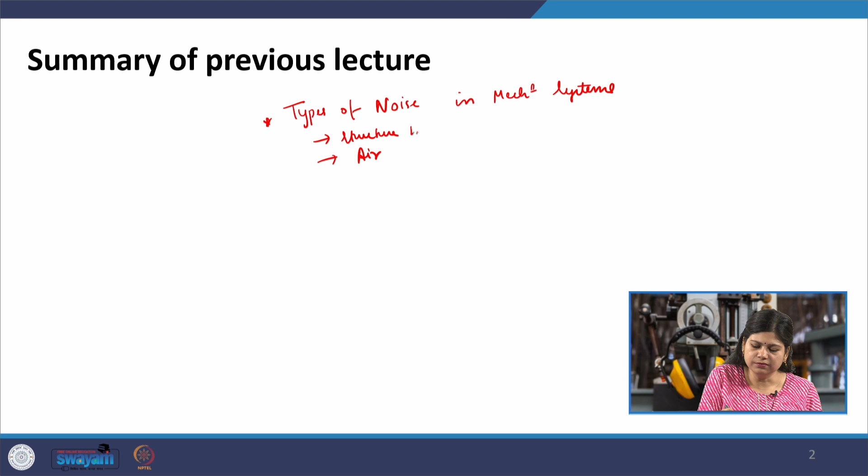So we have begun our module on noise in mechanical systems, and so far we have studied the types of noise typically found in mechanical systems. You have the structure-borne, air-borne, and the fluid-borne types of noise, and then the types of noise in some of the common mechanical systems and their noise sources, such as the noise sources in an engine, in rotational machinery, in fans and compressors.

What are the typical phenomena through which the noise is created, what kind of noise is present, what is the frequency and the temporal content of these noise sources within the mechanical systems and mechanical subcomponents. And then we have also discussed the mechanism of noise generation in these various mechanical devices.

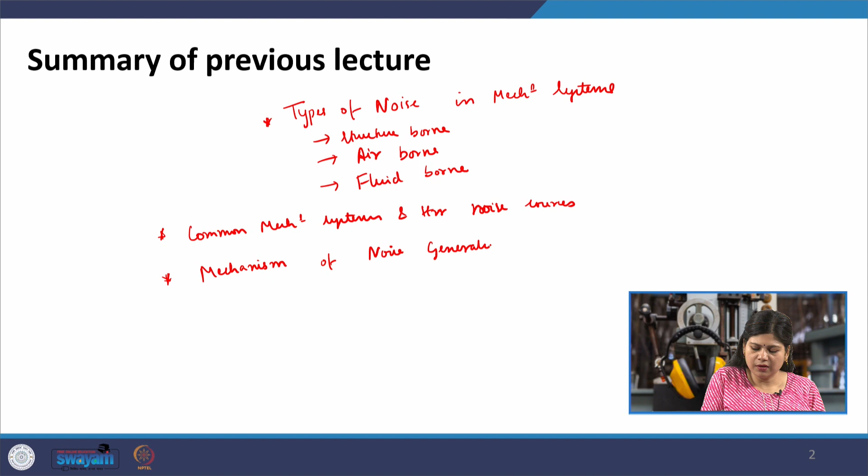So, in this lecture we will study structure-borne noise and air-borne noise in more detail, because these are the two most common categories of noise in mechanical systems, and each of them has a different means of propagating and spreading, and therefore they need different types of noise control techniques. So, we will discuss these things in this lecture.

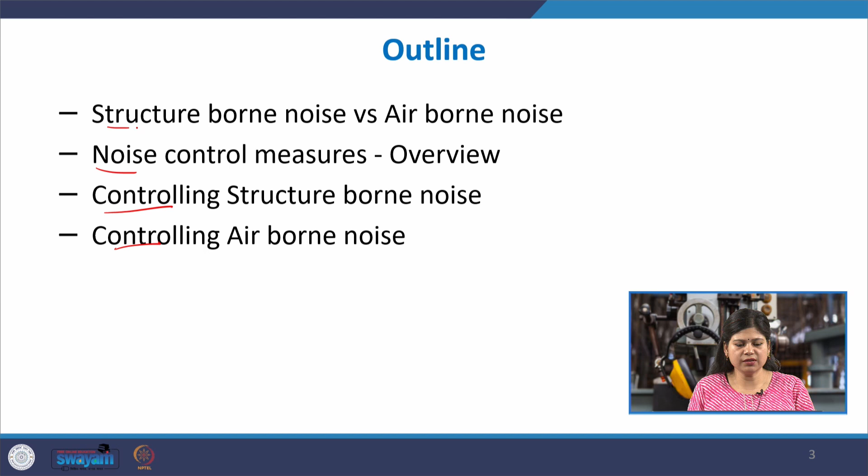So, quickly to recap, the types of noise present in mechanical systems can be divided based on how they propagate, and we have the structure-borne noise, air-borne noise and the fluid-borne noise. These two are the most common forms of noise propagation in mechanical systems, and then we have the fluid-borne as well, but the mechanism of fluid-borne noise is more complicated and is kept out of scope of this lecture series.

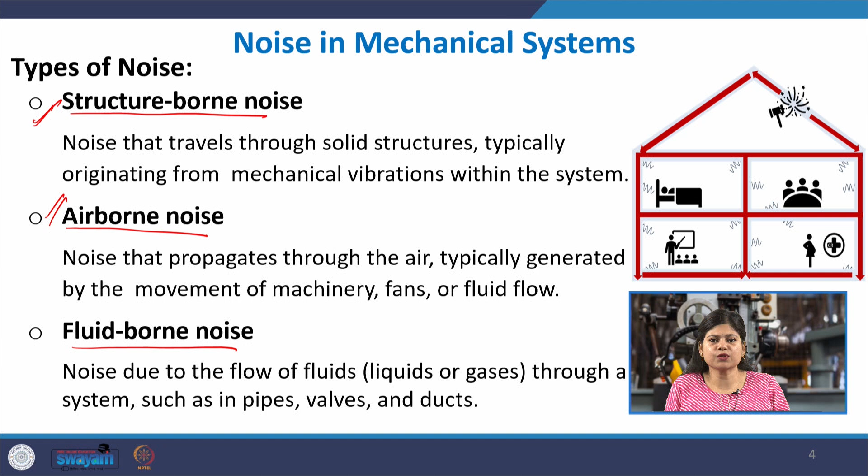So, let us see the structure-borne noise. What is the definition here? These are the sound waves which propagate through the solid material, like the material of the wall, floor or any kind of body of the machinery, and they move within these structures typically as flexural vibrations.

So, let us say this was some kind of a source attached to a long plate or a mount, and this created the noise, and this noise propagated in the form of flexural vibrations of this plate, and then later you have a receiver here, and from here it radiated outwards and reached the listener. And we have already studied the radiation phenomenon and how plates or solid structures can radiate longitudinal sound waves based on the flexural waves created in their structure.

So, here the waves typically propagate through the solid structure in the form of flexural vibrations or other forms of vibrations, and then after a certain threshold they start radiating outwards into the surrounding acoustic medium or the fluid media, and then it can be caught by the listeners as audible noise.

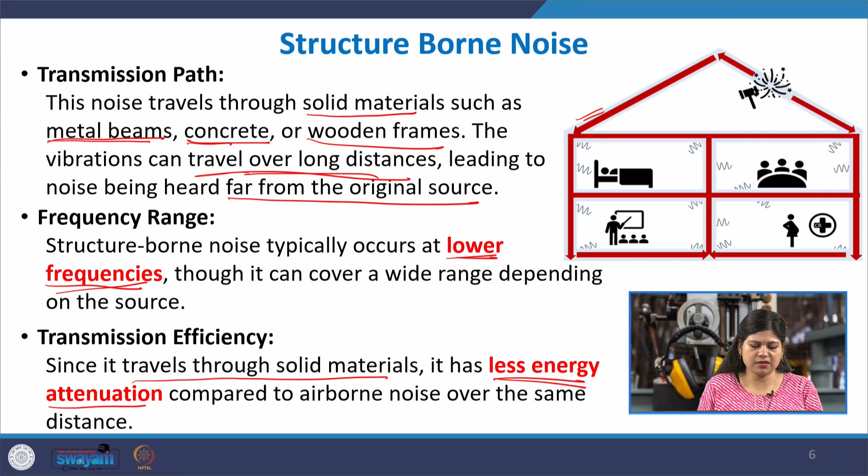And as I told you, the transmission efficiency: because it travels through the solid structures, usually there is much less energy attenuation compared to the airborne. So, they can be heard much louder even at further distances. Let us see the airborne noise in comparison to structure-borne. So, again what happens here?

So, in the previous case you had some noise source which found some pathway through the structures and propagated by means of vibrations in the structure, and finally after a certain point or after a certain threshold it radiated outwards into the air and was heard by the listener. So, the structural elements were one of the major paths through which the sound wave was propagating.

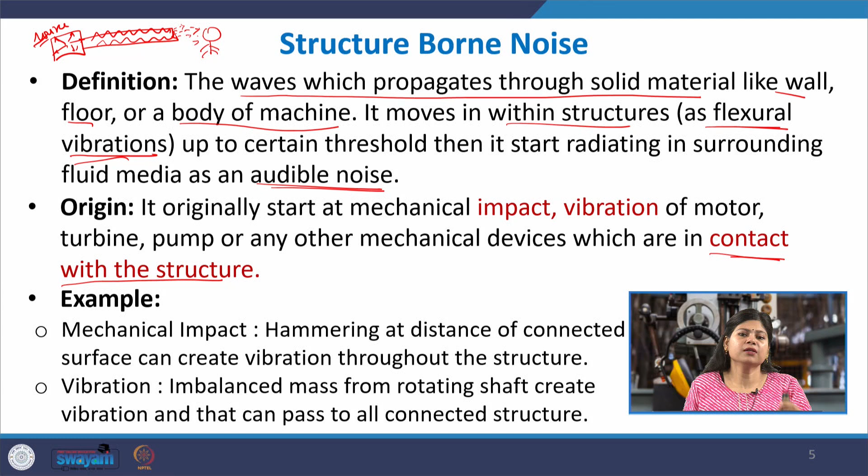But in the airborne, whatever is your noise source, let us say we have a typical example of a person speaking and then there is another listener. So, for example, I am speaking to you. The person is speaking and is creating these speech signals. They are radiating directly into the air. There is no structural pathway here.

Directly from the source they are going into the fluid acoustic medium and are radiating forward as longitudinal acoustic waves. So that becomes your airborne sound. Almost all of the sound that is created from the source is directly going into the air, and then it is being received by the receiver, and there is no significant involvement of structural elements in the pathway.

So for example, the conversations you have, or if somebody is playing the guitar, once again that is airborne sound. Some of the machine tools are creating sound which is propagating outwards in the air. So usually it comes directly from the source into the surrounding environment, like the vehicle horns, the speech, the music, etc.

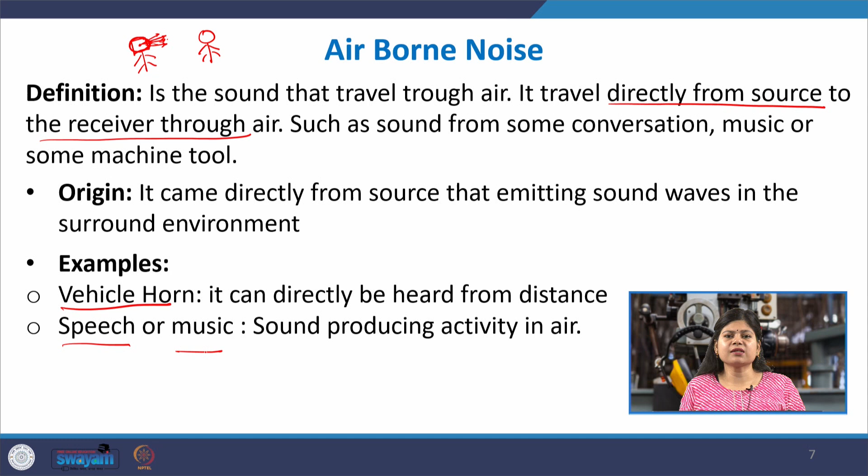All of these are examples of airborne noise. So what is the transmission path here? Obviously the transmission path here is the fluid acoustic medium, the most common being the air or the atmosphere that we live in. Okay, so air is one of the most common media through which these sound waves are propagating. So what happens when the sound waves are propagating through the air? There could be various obstacles on their pathway.

They can find some obstacles like walls, barriers and other such materials which might be able to reflect, absorb or transmit a portion of the sound waves that are incident, and hence these airborne sound waves get attenuated, because in our surroundings, in our atmosphere and in our environment, whenever there is a noise source and the sound waves are propagating, definitely they are going to encounter various kinds of materials and obstructions in the pathway.

Okay, it could be in the form of some object that might be present, some person might be standing, there could be walls or buildings, trees, anything that is present in the atmosphere will be able to reflect and deflect some of the sound waves, and hence because of this the attenuation keeps happening over distances. And not just the presence of these objects, even the air itself has its own resistance.

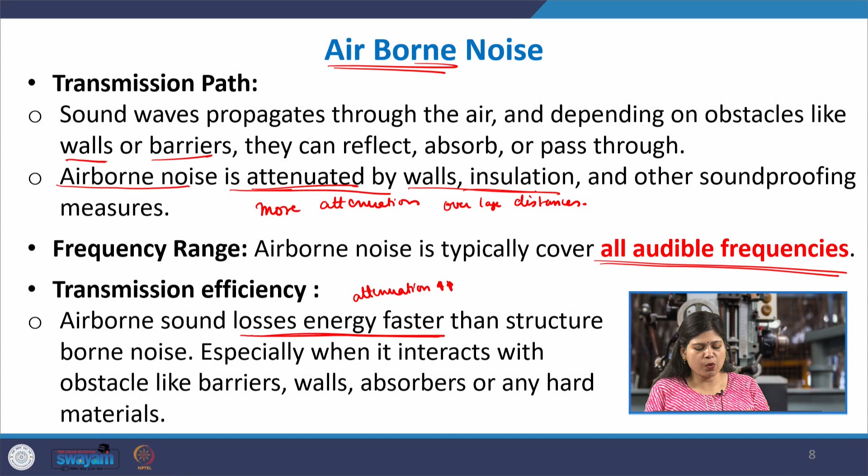The transmission efficiency: obviously the energy is lost much faster. So as I told you, the attenuation suffered by the airborne noise is much more compared to structure-borne, because the sound wave gets to interact with a lot of things in the pathway, the barriers, walls, absorbers and a lot of other things.

So let us see how to control these two different types of noise, the structure-borne and the airborne. In the module on the principles of noise control, I had told you that if you want to control the noise, you can do that using the source-path-receiver model, which means that you either modify the source, which is the most efficient and effective method. You simply change or redesign your source so that it ends up creating less noise.

Otherwise, if you don't have that option, the machinery has been installed and now you are going there as a noise control engineer, and changing the machinery is not an option, then you will modify the pathway. And finally you can modify the receiver, which means you can give some ear plugs or mufflers to the receiver, or enclose the receiver and isolate the receiver from the source.

But path modification then becomes one of the most common methods, and in path modification, structure-borne has a different pathway and airborne has a different pathway. So obviously the control measures will change, because they have different transmission paths and different transmission strategies.

Let's quickly recap the overview of how noise control is done. It could be active or passive. Active is when external energy is needed, and there are technologies through which you create an anti-phase noise to reduce your unwanted sound. Then passive technologies, where no external energy is needed: acoustic enclosures, barriers, dampers or isolators. So basically some passive materials and devices are used to attenuate the noise.

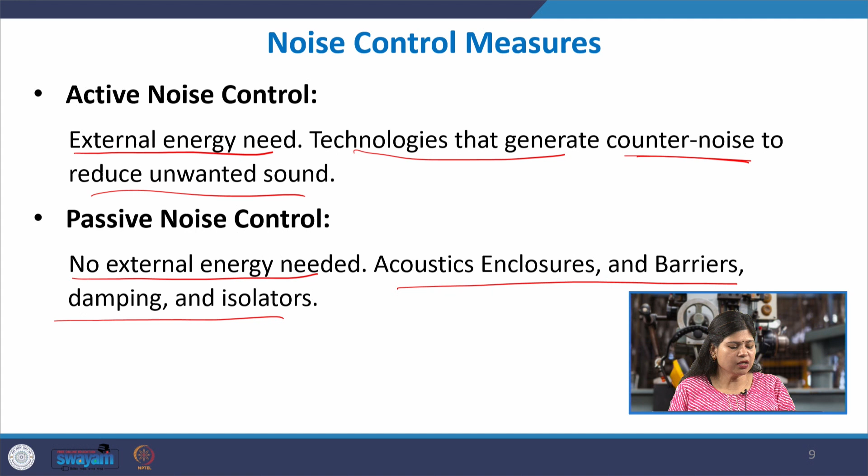And for any mechanical system, the role of maintenance becomes very important, because if the machinery is brand new or in very good condition, properly lubricated and properly fixed and installed with no loose ends, it will run much more smoothly. There will be much less unwanted vibration, fewer unbalanced forces, and therefore less noise created.

So the best way would be to have regular maintenance of the machinery in order to ensure its quiet operation by preventing component wear and tear, reducing friction and vibrations, avoiding failures and downtimes, and always making sure that in the plant or site where these mechanical systems have been installed, you have proper condition monitoring and regular maintenance checks: lubrication, tightening, replacing worn-out components, adjusting the alignment of misaligned parts, debris removal, monitoring excess vibration levels. If all this is done, the machinery is going to function smoothly and it will create less noise.

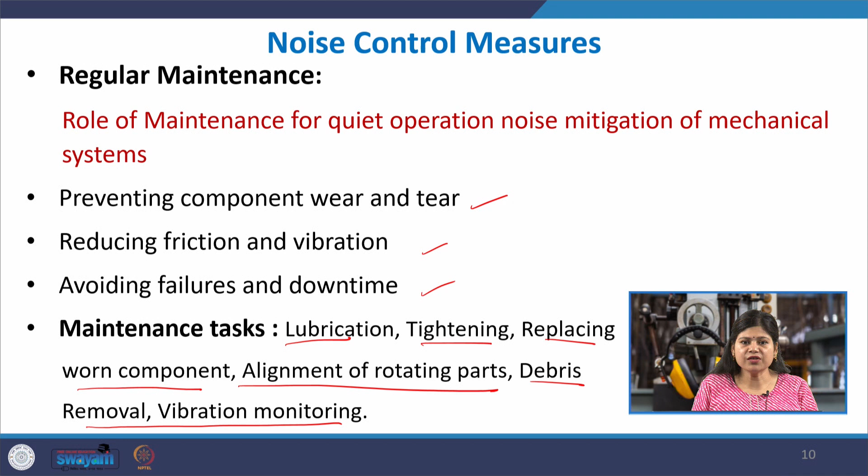So I had already told, like in the previous lectures, that the smoother is the function of any machinery or any kind of mechanical system, the less obstruction or the less resistance they face to their smooth operation, the less would be the noise, and the more resistance or the more obstruction they face to their smooth functioning, the more is going to be the noise created. So with this overview of the typical noise control strategy for mechanical systems, let us see the differences in controlling structure-borne noise and airborne noise.

When we are talking about structure-borne noise, as I told you, as a noise control engineer, if you cannot modify the source, then you have to modify the pathway. And in the case of structure-borne noise, the pathways are these solid structural elements, and it is propagating as vibrations through these structural elements. So the main noise control strategy would be to control this vibration transmission through these interconnecting pathways. Whatever is the structural path that the noise is taking, you have to control the vibration transmission through this.

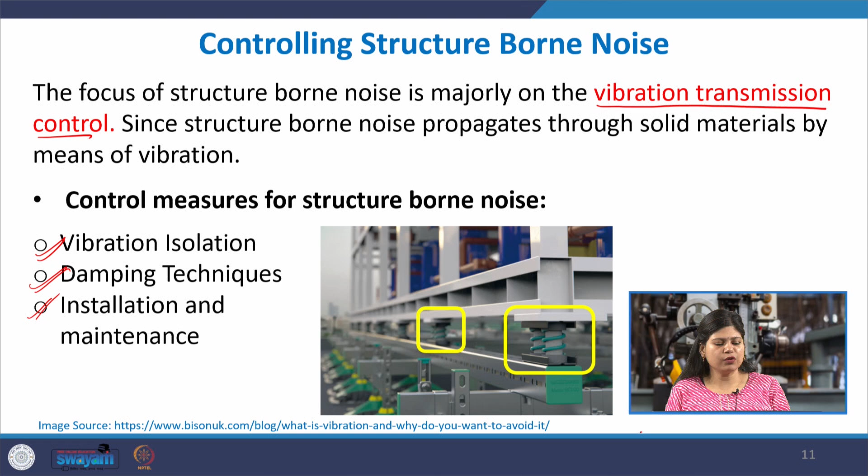Various kinds of measures like vibration isolators could be used and installed in the major pathway of the noise between the noise source and the listener, damping techniques, and installation and maintenance. Let's quickly have a look one by one at these strategies. So the first one is vibration isolation.

Here isolation means that, from the schematic I can show you, this is your noise source, the source that is creating the noise, and this is, let us say, your receiver who is going to receive it. You have some pathways. It could be in the form of the mounts of the machineries or the frames and stands or any kind of other structural elements that are present between the noise source and the receiver, and your major noise is propagating through these pathways like this. It is propagating as structure-borne noise. So what you would do is you would modify this pathway.

So the principle of vibration isolation, or the philosophy, is that you change the pathway so that it is able to isolate or stop the transmission from the source to the receiver. Whatever vibrations were going this way, suppose some kind of isolating devices you have installed in the pathway. What they will do is isolate the vibrations. Whatever vibrations were traveling, they will damp out, then again more damp, and by the time they reach this end, they would flatten out. So you isolate the vibration between the source and the receiver, preventing the transmission of the vibration waves generated from the source to the surrounding structure through which it might propagate.

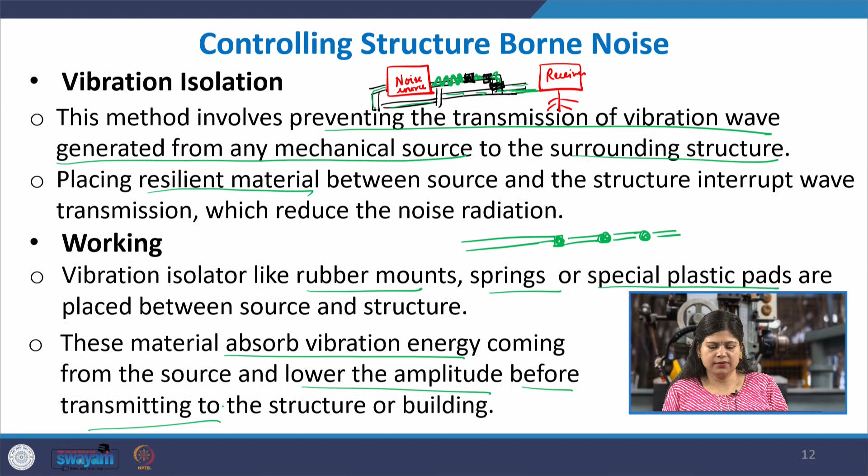Here we have a machinery. It is directly installed on the ground, but at the connection points these spring type vibration isolators have been put, and the main purpose is that if the vibrations are generated here, they would not propagate over here. So, they would be blocked by this and will not go there, from the machinery to the ground structure.

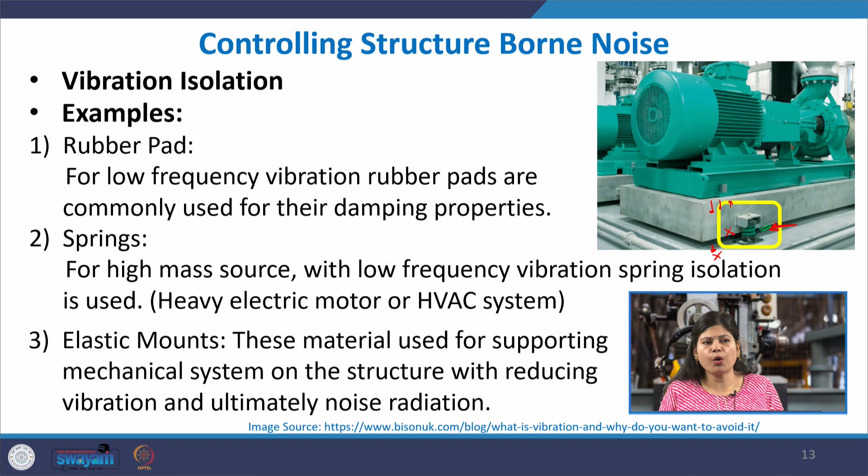So, rubber pads, springs, various kinds of elastic mounts are also available, and all of these are known to stop the flow of vibration. Now, the other technique is damping. So, just like we have vibration isolation, the other one is damping of the vibration. There is a difference between isolation and damping. Isolation means stopping the transmission of the vibration waves. So, you can have these isolation devices along the pathway and they can stop the transmission of the vibration waves.

But damping means a means through which the vibrational energy can be dissipated in the form of heat. So, some kind of frictional elements, some kind of frictional devices. If the vibration is passing through them, then due to the friction faced, the vibrational energy is converting into heat energy and is dissipating in the atmosphere, and that is leading to the loss of energy. So, they typically dissipate the vibration energy as heat, and in that process they help in reducing the vibrations passing through the structure.

Typically, viscoelastic materials are one of the most common damping materials used. For example, the various kinds of rubbers and composite materials tend to be better damping materials. They can be thought of as more resistive to the flow of vibration, and they convert the vibrational energy into friction and heat. So, these kinds of damping materials can be used. So, a difference needs to be understood here: isolation is simply stopping the waves and damping is converting it into heat energy. The third major technique is proper installation and maintenance.

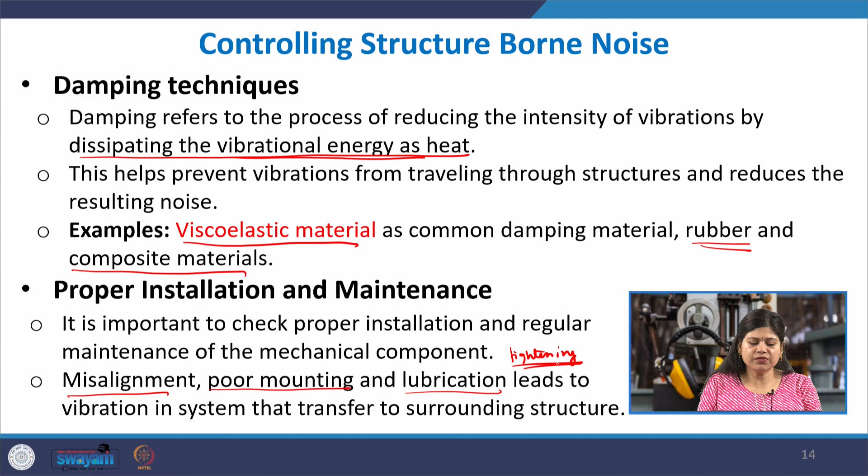So, installation and maintenance again plays a very important role in reducing the vibrations: proper mounting, reducing the misalignments, lubrication, proper fixing and tightening of the materials, making sure that there are no loose ends, etc. All of this can help in reducing vibration. Now, how do we control the airborne noise?

Airborne noise typically travels through the air as sound waves, and already a long module was dedicated in this lecture series to noise control, and we studied the various passive noise control devices such as the barriers and the absorbers, and within the absorbers we studied porous materials, Helmholtz resonators, and barriers and enclosures. So, all of that was a means of controlling airborne noise. So, we have already discussed in depth how we control the airborne noise.

Because a sound wave is traveling through the air, you keep installing more structures that can act as obstructions to the flow of the sound waves. And these structures could either be barriers which reflect back the sound waves, or absorbers which absorb and convert the sound energy into heat. Various kinds of absorbers we have seen, like the porous materials, the Helmholtz resonators, the acoustic metamaterials, perforated panels and micro perforated panels; these are resonance based sound absorbers. And similarly, the barriers and enclosures are all methods of controlling airborne noise.

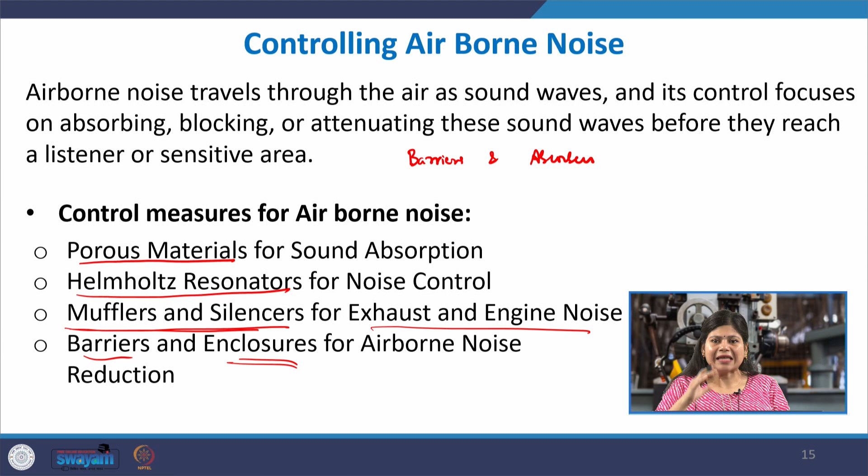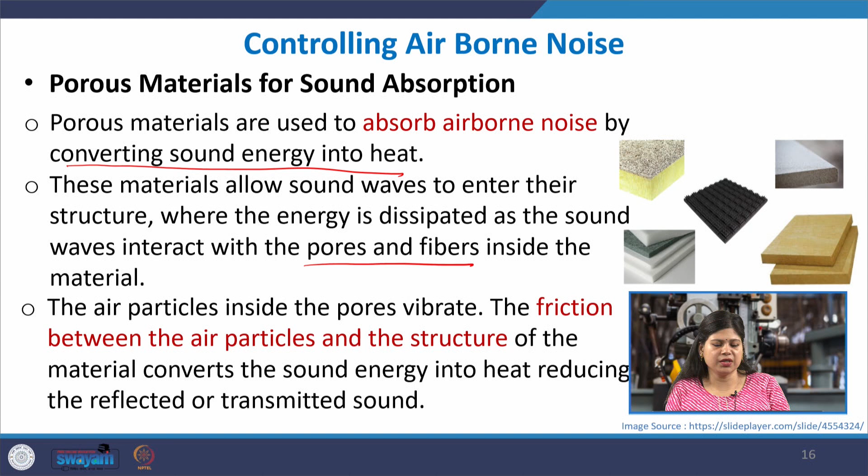Especially in the exhaust and the engine noise, it can be reduced by having mufflers and silencers which are installed literally in every tailpipe of a vehicle. So, what are these porous materials? They dissipate the sound energy as heat. Why? Because the sound wave faces more obstructions from the various pores and fibers within these kinds of materials, which converts the sound waves into heat, and we have discussed these porous materials and their method of operation in detail in the previous lectures.

And what has been observed is that these porous materials are more effective in high and mid frequency noise control, and some of the most common porous materials that you find is fiberglass, which is amongst the most widely used industrial porous materials. It is very widely used in industries, in most of the building applications for soundproofing purposes.

Then these days even foams, and by foams you have open cell foams. Commercially in the market you can find open cell, closed cell and so on, but open cell foams are the ones that would be handy because they are the ones that would act as absorbers. They have to allow the sound waves to enter inside and get dissipated. So, the open cell foams are usually used in appliances and machinery.

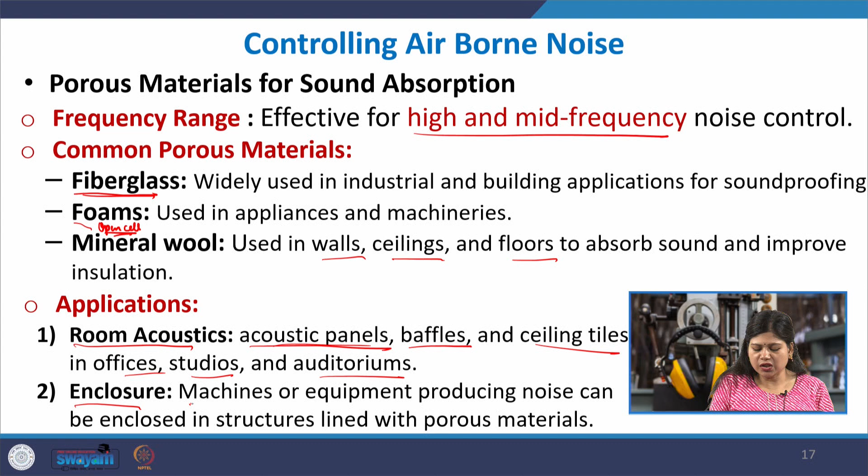Then mineral wool is also being used a lot these days in walls, ceilings and floors to absorb the sound and improve the insulation of buildings and indoor spaces. So, in room acoustics, they are being used for offices, studios, auditoriums in the form of acoustic panels, baffles and ceiling tiles. The enclosures are mostly used in industrial plants for enclosing the machinery or the equipment.

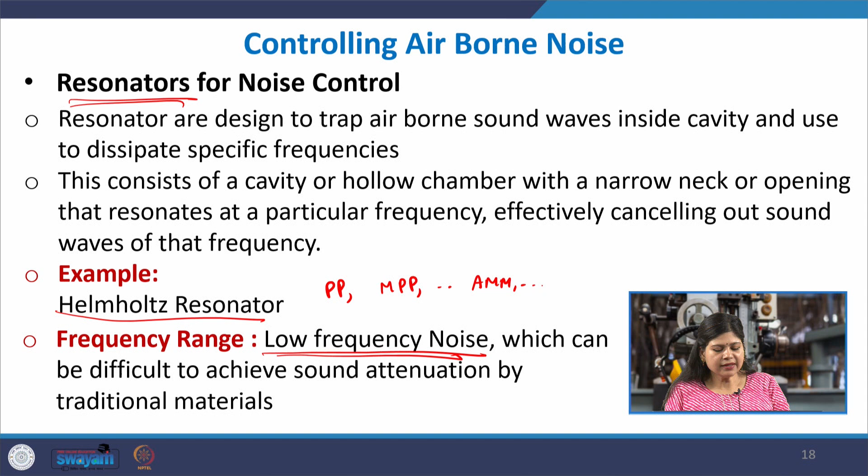Then resonators are being used because these porous materials are more commonly used to control high and mid frequency noise. So, for targeted low frequency noise control, resonators are being used. It could be a Helmholtz resonator, a perforated panel, a micro perforated panel or an acoustic metamaterial. All of these are a means of controlling low frequency noise. They use the resonance phenomenon and are able to achieve sound wave attenuation.

And they are now being applied even in the automotive exhaust system, where you have the silencer, and in the silencer you can find perforated panels, then Helmholtz resonators and various kinds of expansion chambers that act as resonators. So, typically these are used in automotive exhaust systems.

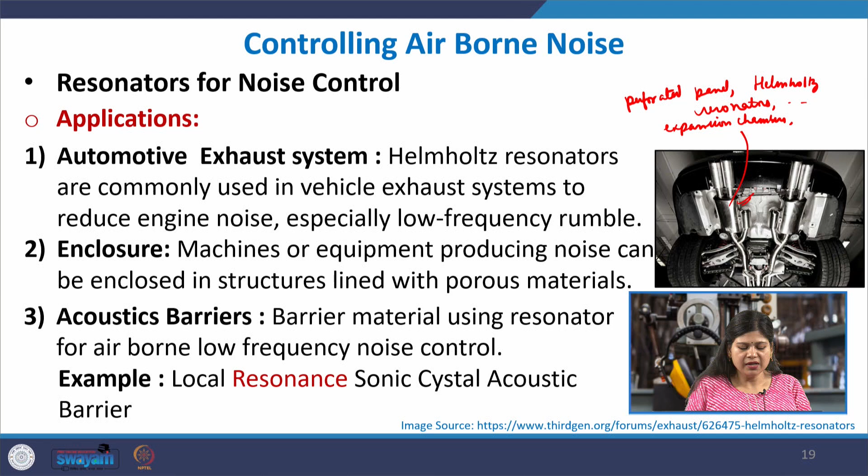Even in some of the newly designed enclosures and acoustic barriers, we are now incorporating these resonators. So, these are the new technologies that are coming up, like the local resonance sonic crystal acoustic barrier that is now being used. The mufflers and silencers I already told you about. In the exhaust and the engine you can see them, and they have various kinds of compartments with perforations.

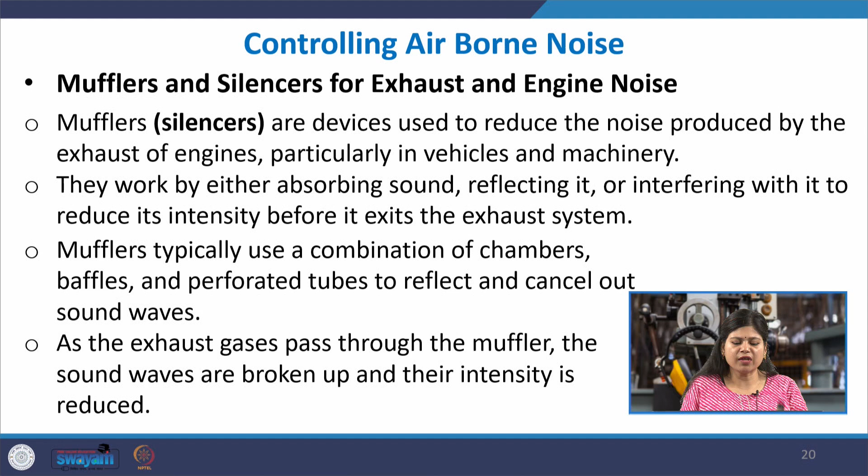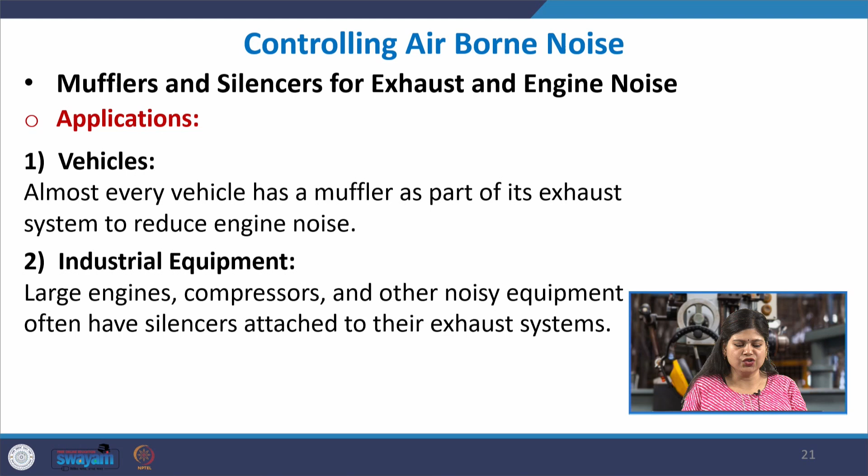The perforations help in the thermoviscous losses, and then we have the Helmholtz cavity, which also helps in resonance based sound absorption, and they are applied in vehicles and industrial equipment wherever we make use of the exhaust and the engine. So, acoustic barriers and enclosures are used for airborne noise control, made of concrete, bricks or other kinds of soundproof materials.

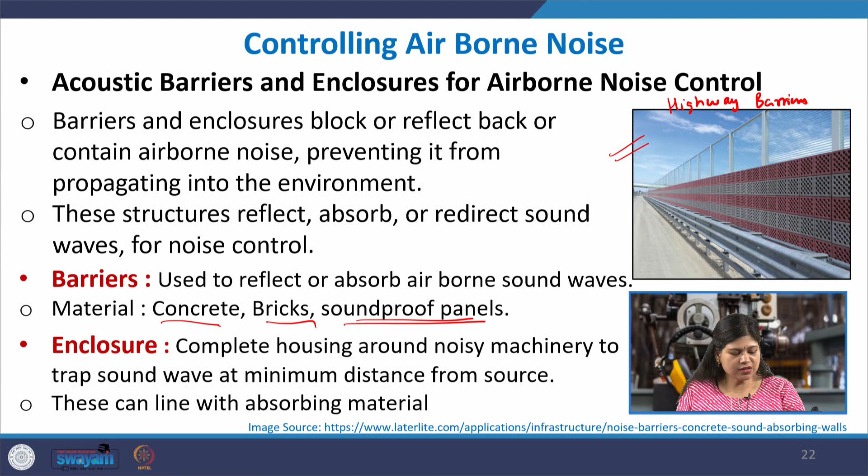Especially you can find these highway barriers, and there are barriers or enclosures in construction sites. These are images taken from around the campus of IIT Roorkee, where you can see that these barriers are installed wherever construction is happening, so that they can contain the noise within the construction site and stop it from propagating outside to residential and quieter areas.

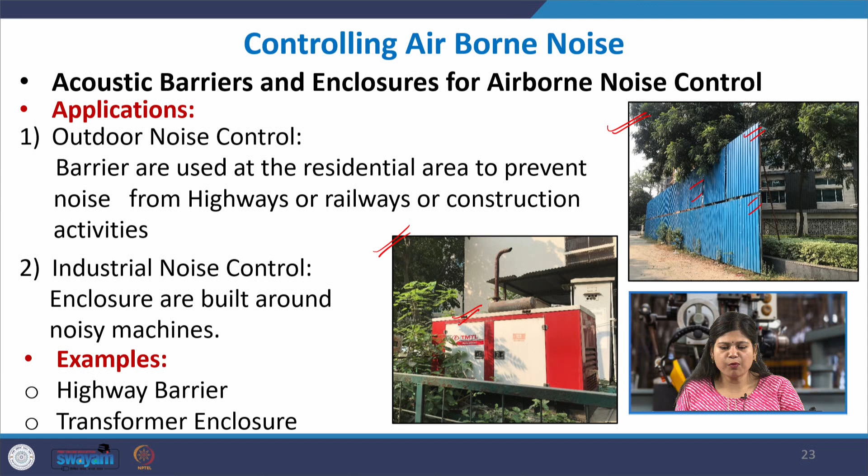In the same way, transformer rooms are always enclosed completely using these enclosures, and all of these are methods of controlling airborne noise. So, this is a quick summary of whatever has been taught in this lecture, which could be used as a go-to guide for any noise control engineer.

So, for structure-borne noise, the medium is solid structures, walls, floors and machinery parts. For airborne noise, it is air. The source is usually the vibration of the structures or components, but here the sound waves are radiating directly from your machinery or person. In the control methods, we basically have isolation. So, we try to stop the vibration from propagating through. We can either isolate it or we can damp it.

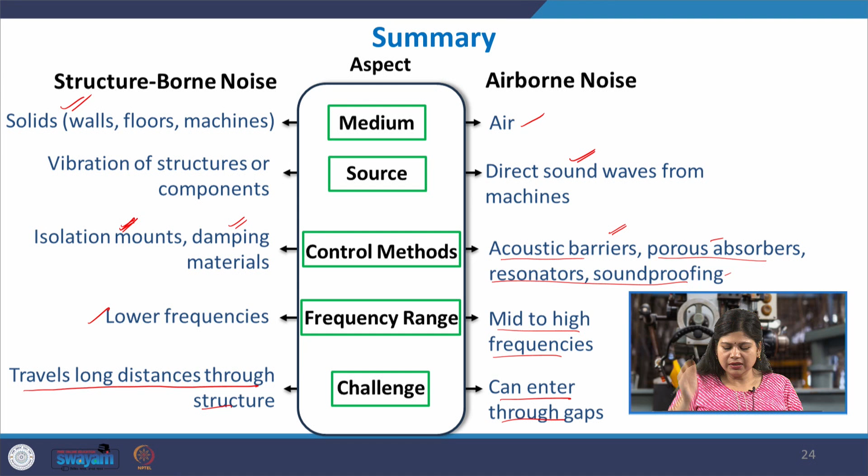And in the control methods here, we can install obstructions in the pathway. In the air, we could have barriers, enclosures, resonators and various other soundproofing materials. The frequency range here is lower, and we have mid to high frequencies in the airborne case. The challenges are that it travels over long distances with much less attenuation and is much harder to control. And here the challenge is that even a small gap in your enclosure and it is going to propagate through. So, things need to be properly sealed.